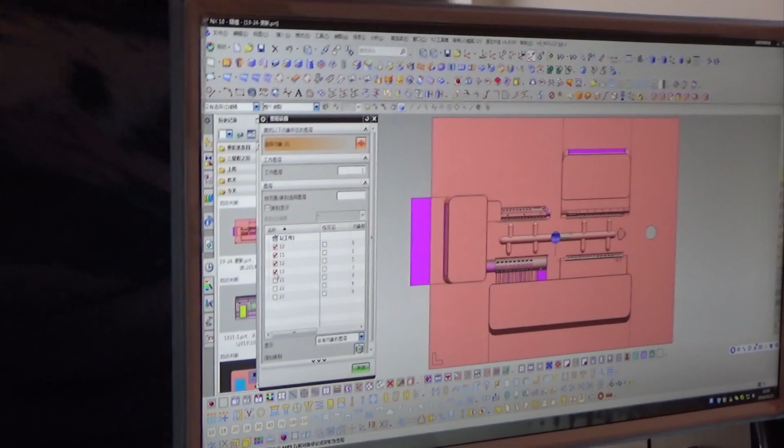Wanted to come to you again with another video from our Chinese visit. Had some audio issues up front. I wanted to show you some of the 3D modeling that goes into making molds, and some new product and some old product. Even some of the product that we designed and manufactured with ENS.

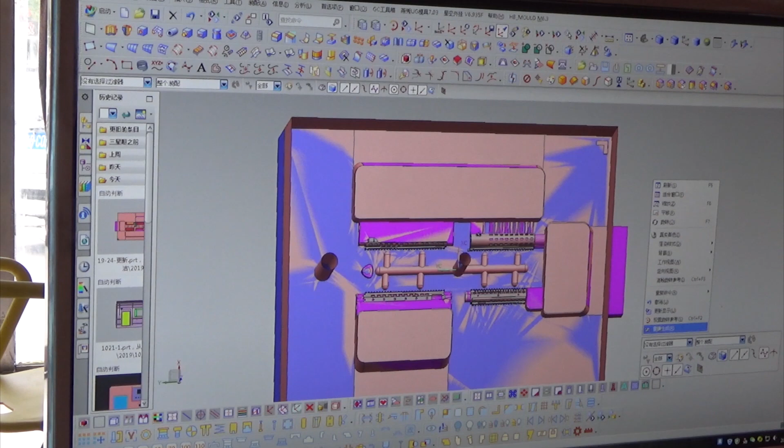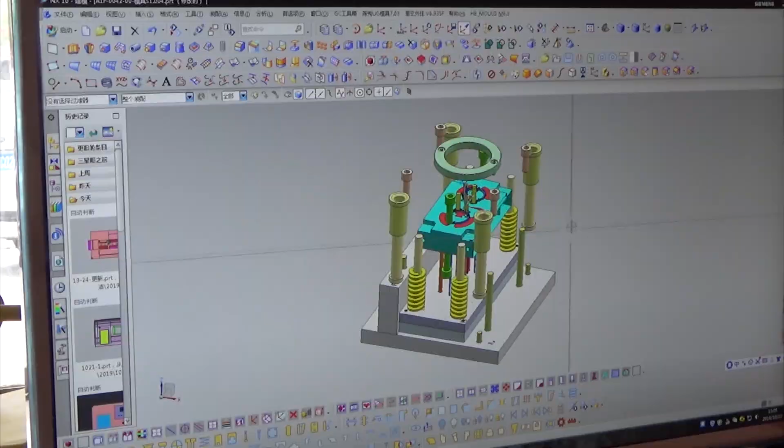In this video, we're also going to go over sliders. That's a really important part in these molds. Essentially what that does, a slider goes into the hollow part of the mold, and the plastic is injected around the slider, so that when the slider comes out, you have a barrel that has a hole in it. That's how the hole gets there. When the audio comes back, you won't have missed anything about the sliders. Enjoy! This is a three-dimensional software.

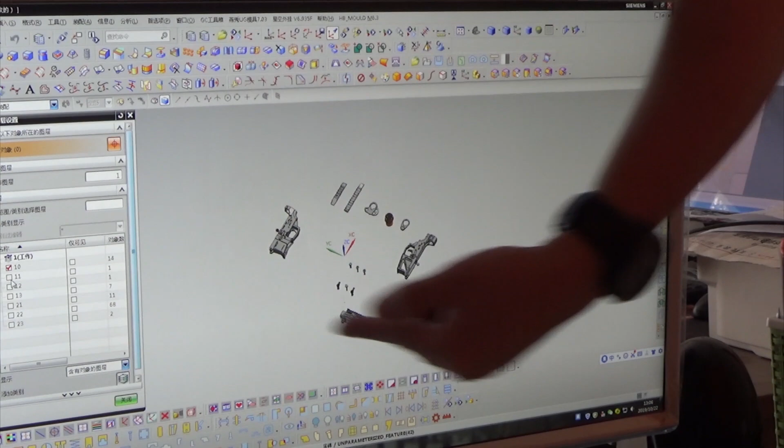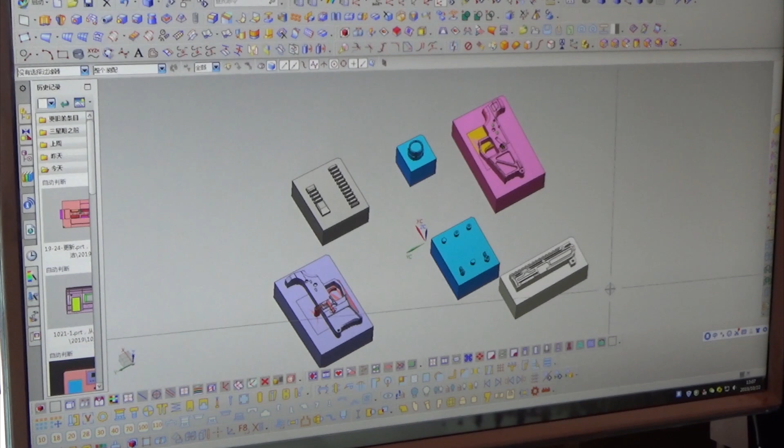Okay, this is the skeleton upper lower receiver. Yeah, for the girl. You can see how many sliders. All the directions, and for some directions you have 2 sliders. This is the original file of the copper thing. So they use this file to carve, to engrave the carbon. Yep. And then these things get stamped into the mold.

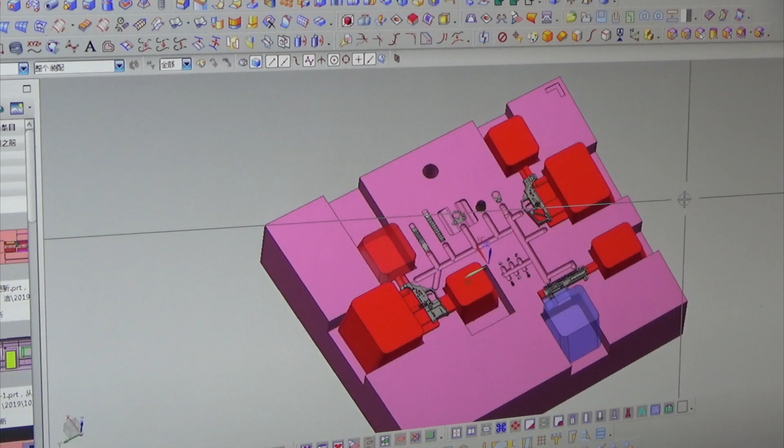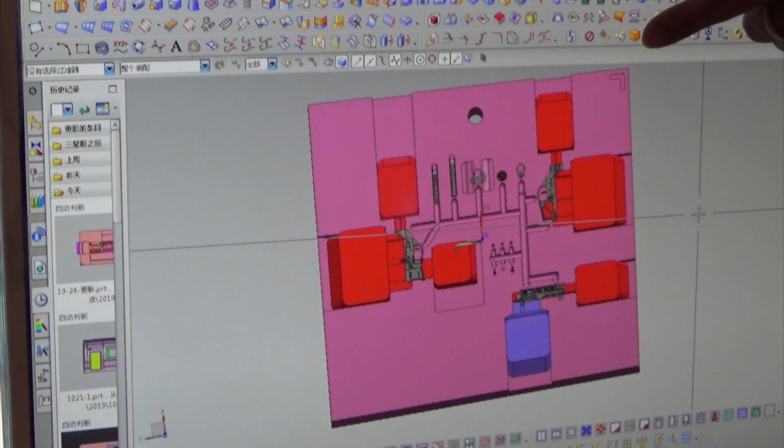7 sliders. To make it, you can see, because this is a lower receiver, they need a slider from this direction for the mag well and for the fire selection area part, and another slider here for the buffer tube. Buffer tube. Yeah. When the slider comes out, how does it not take plastic with it? How does it? Magic. It is. Oil, actually some lubricated oil to make sure it's not attached to the plastic.

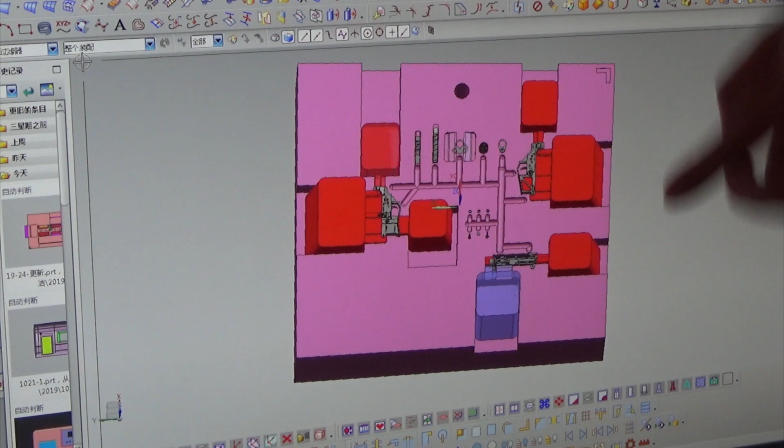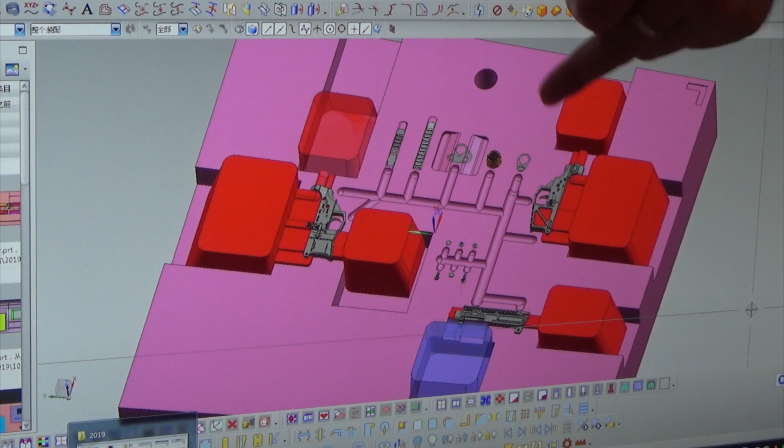And this one, this is upper receiver. So it's one slider for the bolt, yeah, and another one here for the. So here's the question. On a slider, so you have a piece of plastic that's solid. You push the slider in. Does it melt it? The slider was put in before the injection. Gotcha. So then it injects around, and then you pull it out. Yeah. Got it. So this is a very complex one. This is maybe over 30, 35. 35,000, yeah, for just the mold.

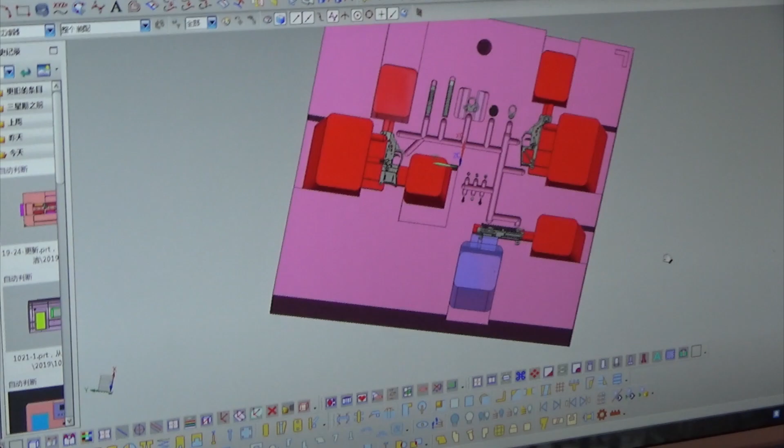How does he know which pieces to take apart and then make a left and a right? How does he know all that? We all know that. It's in our blood. I don't know how to explain this. Okay. So here's the question. When your 3D guy at your office does the 3D model, how do they decide what pieces from his whole 3D model are going to go into this mold? We all know how to do that, because it's just follow.

They have rules here. So we actually do it in brain. So okay, this part goes here, this part goes there. It's hard to explain, but it works all the way. No problem. Do you have to design new figures, and you have to know how to make them? Sure. So much to know.

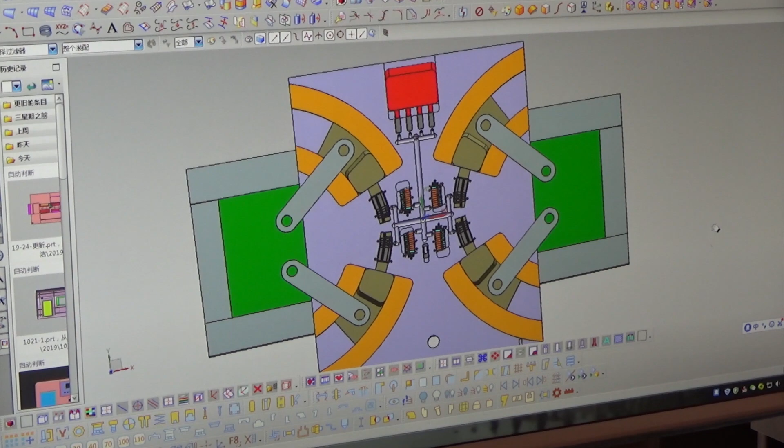These are all separate molds. What is that? These are magazines. So AR-15 magazines. This is 416. 417. This is a round. This is another very complex mold, because you can see the slider here. Because magazine is curved. It's curved. So we need to make the slider real curve.

Wow. That's not straight. So it actually makes the mold more complex. It's much more complex. Injection and pressure to make these things happen. So maybe you guess, okay, this is just a magazine, maybe the easiest part of the rifle, but actually this is one of the most complex molds. Yes, very complex one.

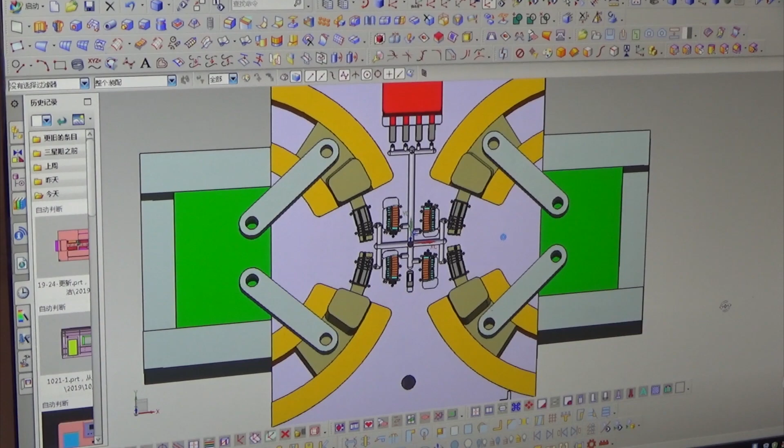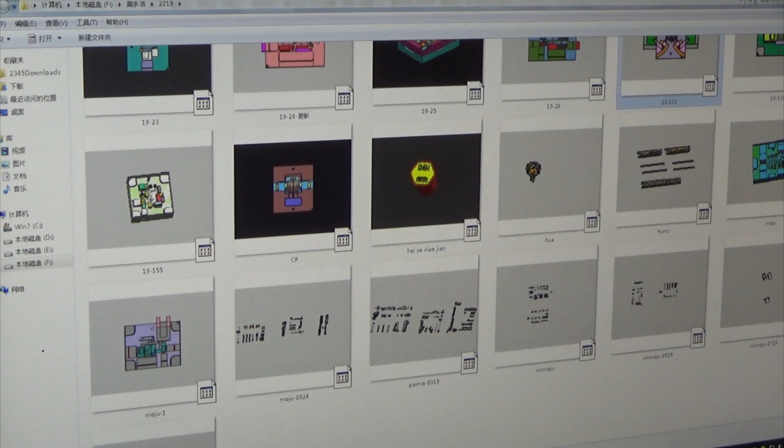Wow, that's crazy. This mold needs to be injected with transparent plastic, which makes the mold more expensive, because that material eats the steel. Oh wow. So we need to have a coating on this mold. Special lubricant. Yes, otherwise maybe after 5,000 rounds of injection, this mold is gone. Rusted.

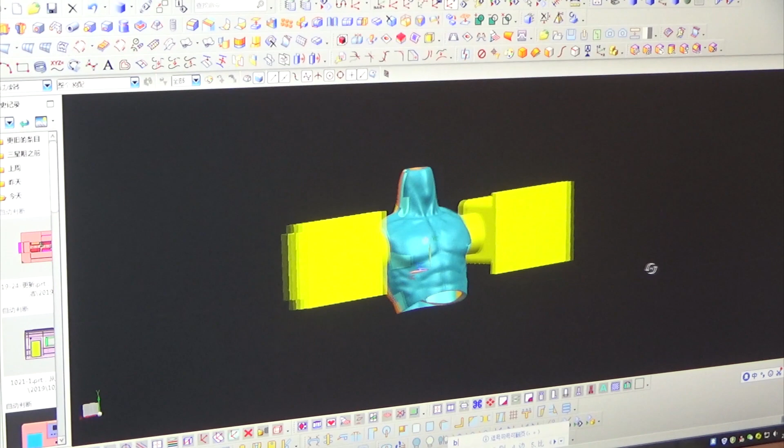Body. Yes, this is the model body. You can see this is also 2 sliders. Wow. One mold for that. One individual mold for that. So just that piece is one mold. It's one mold.

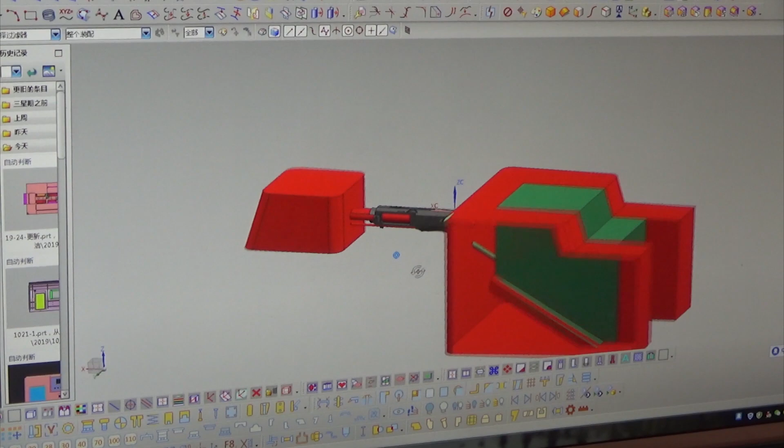Okay, this is another example of complex mold. This is an AR-15 upper receiver. Wow. So you have the die here. There's what is that? There's a buffer. The injection system, yeah. So 1, 2, 3, and this one is very complex. You can imagine it. Yeah, 'cause you got the little curve.

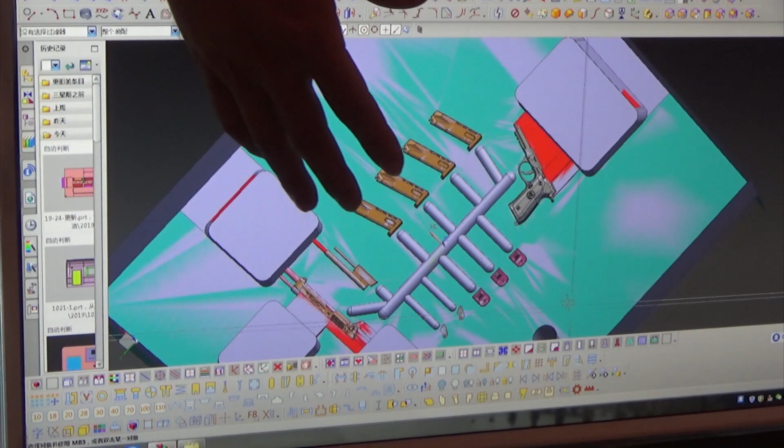You need to dig a tunnel in the mold, so that's it. Crazy. Okay, this is a magazine. This is a mold of a pistol. This is the M9. M9 Beretta, yeah. You can see the complexity of this mold. So one, two, three. This is one mold for one pistol. The whole pistol though.

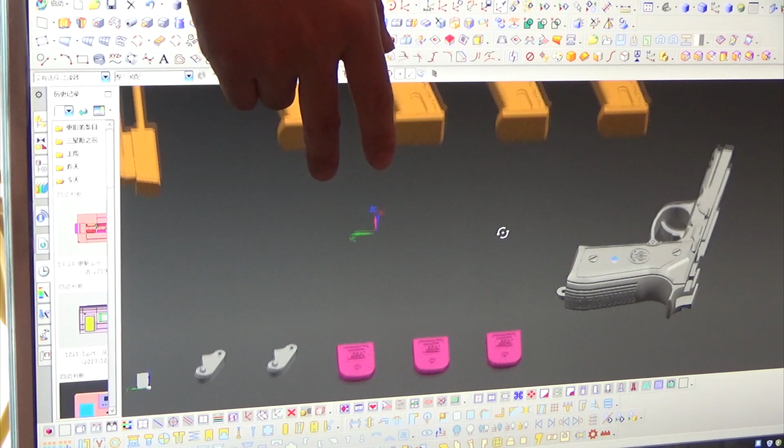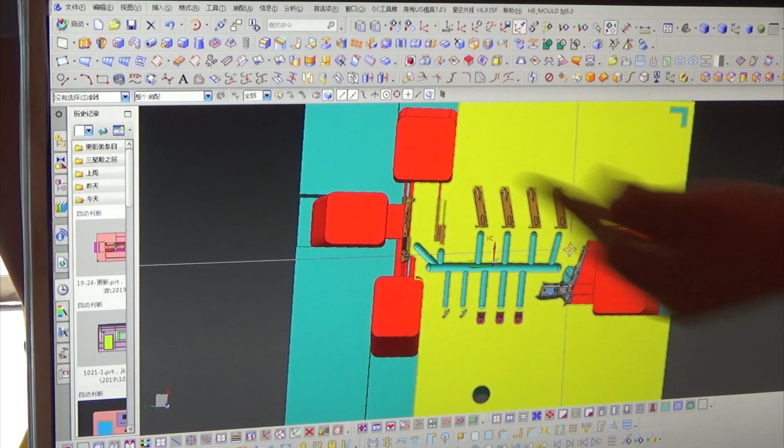Yeah, whole pistol with all the mags and the plates and everything. This is the hammer. This is the bottom of the magazine. This is the barrel. This is the upper, the slider. Wow. Four sliders, one, two, three, four. You can see there's four sliders for this mold. That's amazing. That's awesome.

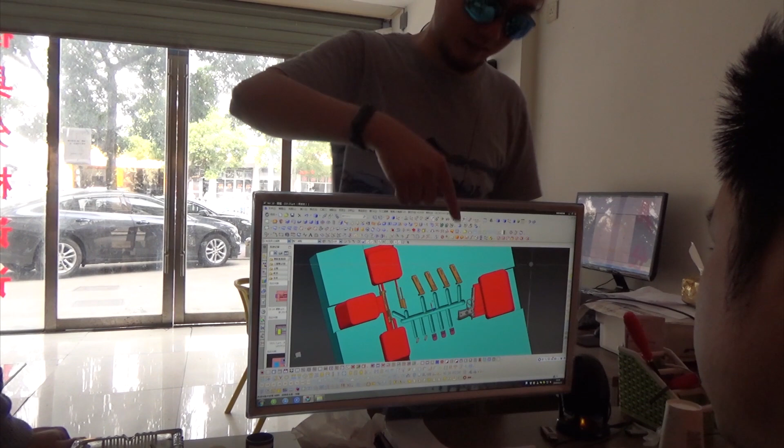So how long does it take for your guy to do a 3D model of this? Depends on the different things. For a pistol, it's like three weeks, two or three weeks, maybe two weeks. But this one has a lot of curves because of the handle grip. So it's all curved surface. It takes a long time to build the 3D model.

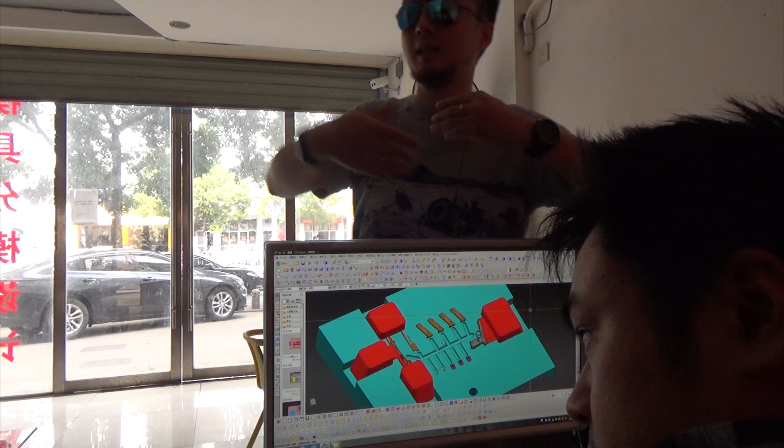So once you have three weeks to do your part, how long does it take him to do this? Depends, but they can do it one by one. After finishing one mold, it goes to that place so they can work on the next one. Next one, yeah.

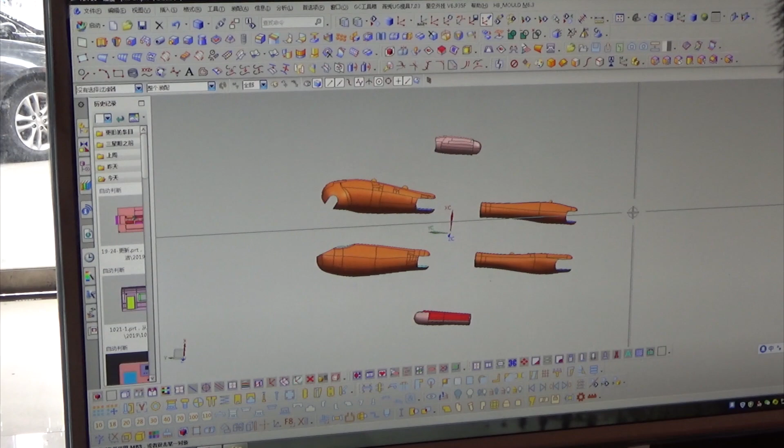Okay, this is the legs. Upper thigh, calf. This set has seven molds total. Upper thigh and calf. Upside of the front and calf. This is the joints for the female body.

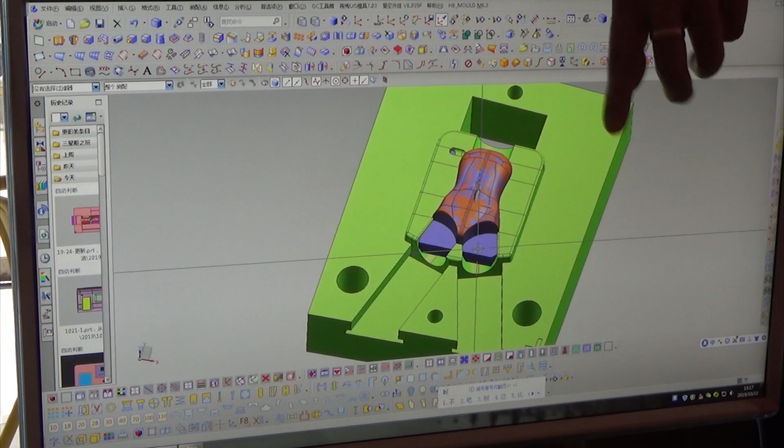One mold for the skin. So this is PVC, right? Yeah, it's a different soft material. So we can do the transparency one. This is the inner structure. So we will replace this with a mechanical thing.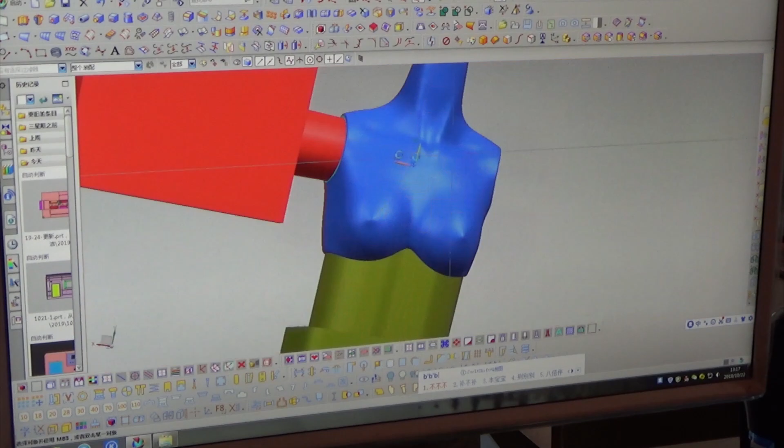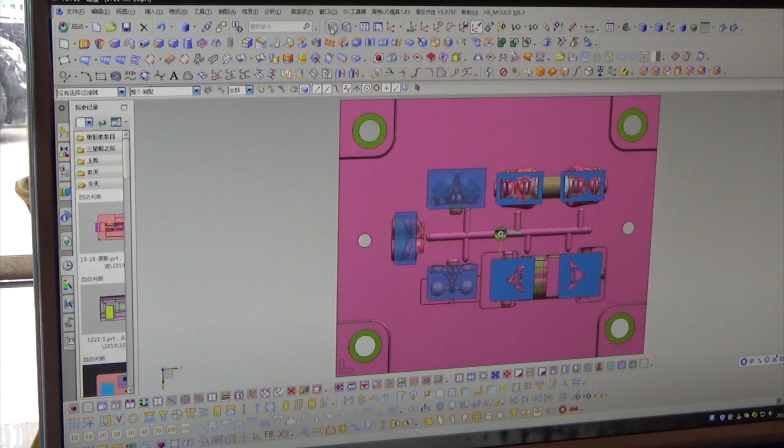So this is very difficult for a 3D engineer to build because it's all curves. There's no straight line. Wow. This is even more difficult than the car shell. The car shell is very difficult because there's no straight line, all different curves. But this one is more complex because there's skin.

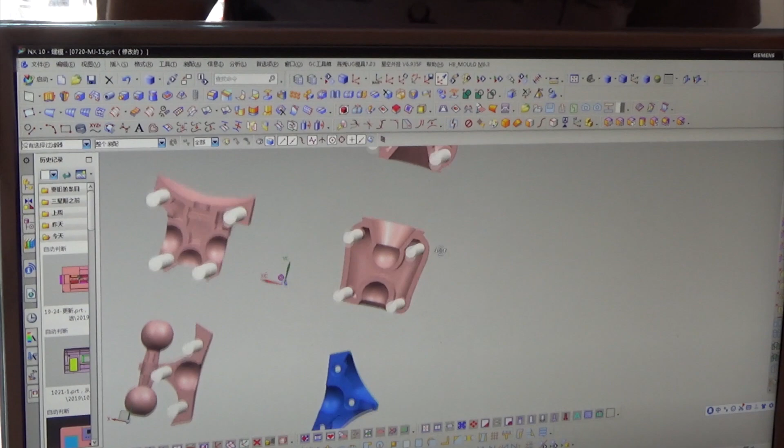So these are all your inner parts. This is the torso, the leg, the hip. So this is your upper chest. Back. That's your butt. That's super cool. Wow.

Very expensive business here. Very expensive. You gotta know somebody.

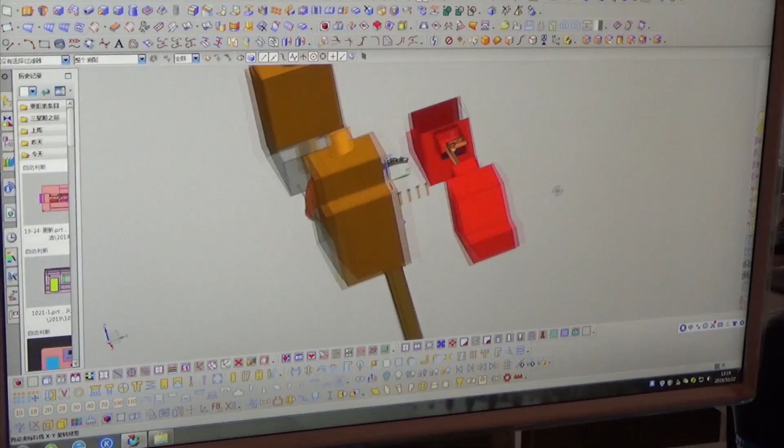Okay, this is a helmet. You can see one helmet, one mold. Okay, what's this? This is the holder for the NVG visor. But you can see only one mold. And then you actually have screws that go in the side. So these go here.

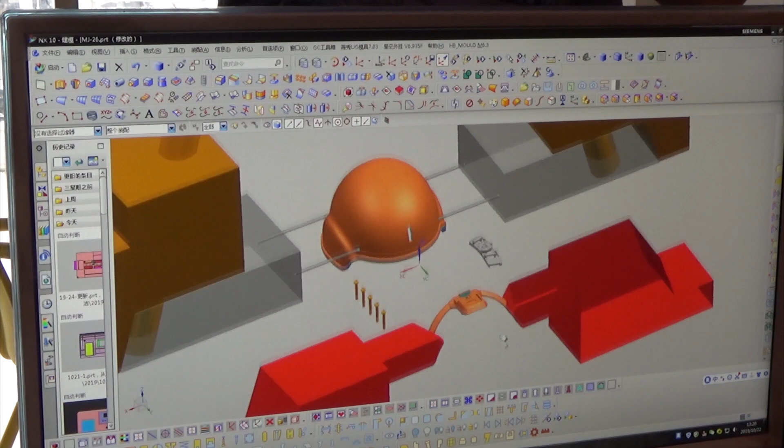Wow, that's cool. And for the buckles on the suspension, another mold, because of different material. This is ABS, all ABS, but that one is nylon because we need more durability. Otherwise it's very easy to break because it's very thin. Which figure is this one from? Green Wolf Gear, British soldier. Okay.

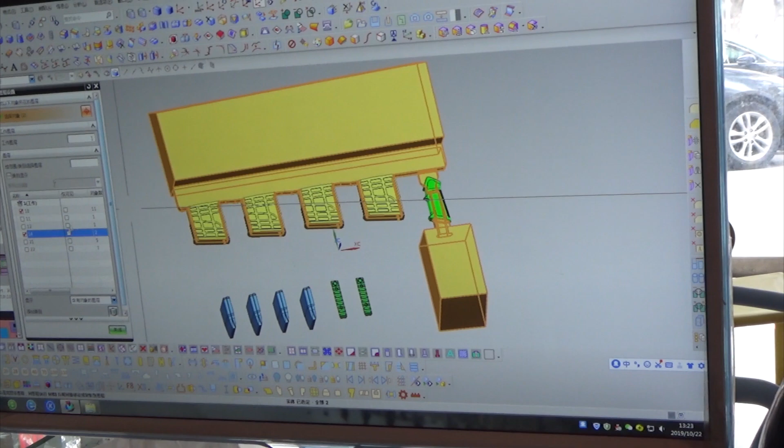This is a magazine of the Emerald. And the handle. So you put the magazines, the rails. This is what we call the very expensive upper receiver here. The lower receiver, yes, you see.

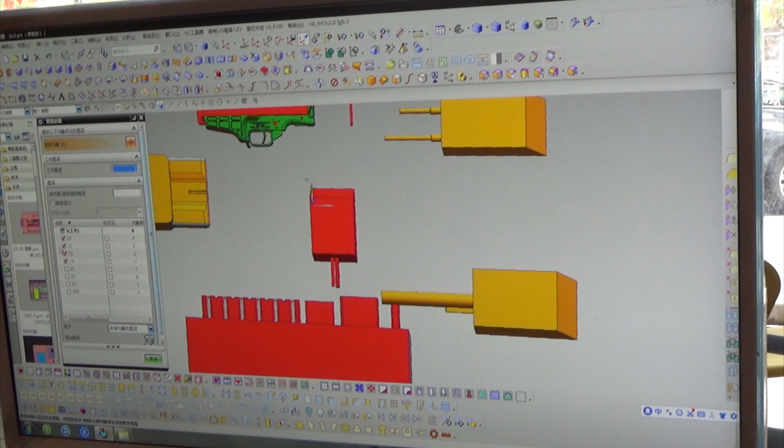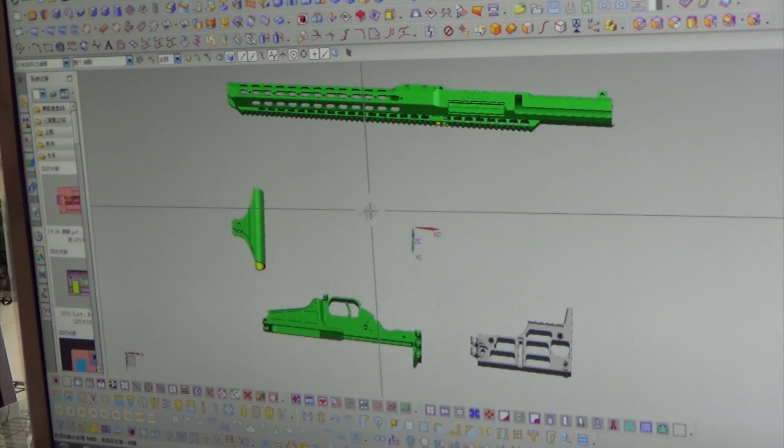So what makes it so expensive is how big it is, right? Yes, this is the big rifle. So this is the Emerald. Very cool. So you can see only four parts in one mold. But that right there, that's expensive. So you want us to design longer weapons for bigger molds? Whatever you can make is big.

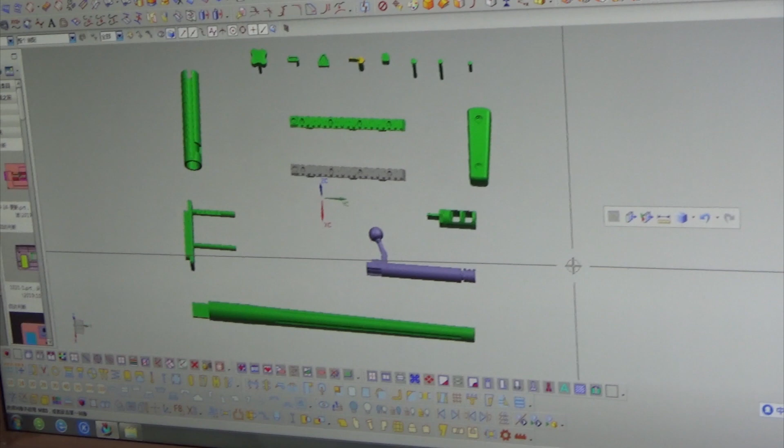Do you think these same blueprints exist at the gun manufacturer for full scale? Yeah, this is the real deal, the real 3D file, so we just shrink it down and make it easier or workable for the tooling. Sure. That was a good one, right?